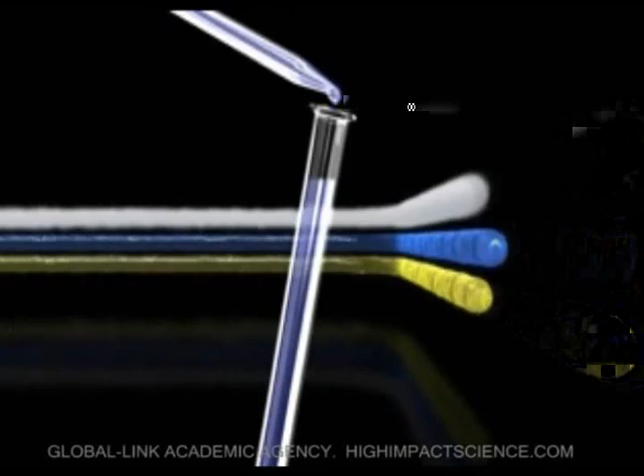The term fluid refers to both liquids and gases. Flow is due to pressure difference between regions. Flowing in systems like pipes, channels, streams, and so on, any fluid experiences internal friction known as viscosity, between its particles and layers.

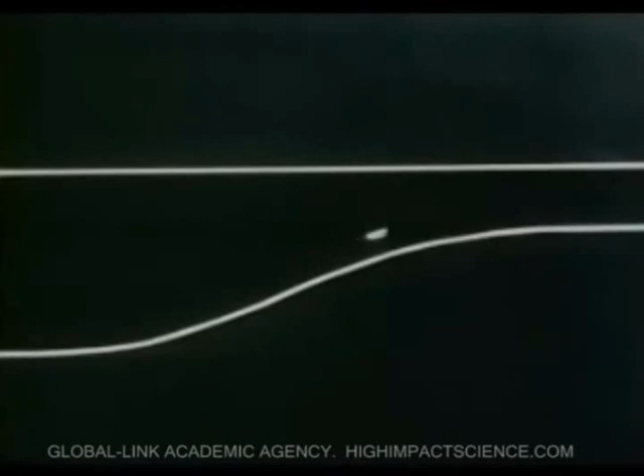In this chapter, we shall ignore the viscosity of any fluid under consideration, by looking at the types of flows: streamline or steady flow. If all the particles at any given point have the same velocity, then they share the same flow and can be represented by a line. A streamline is a curve whose tangent at any given point is along the direction of displacement of the fluid particle at that point.

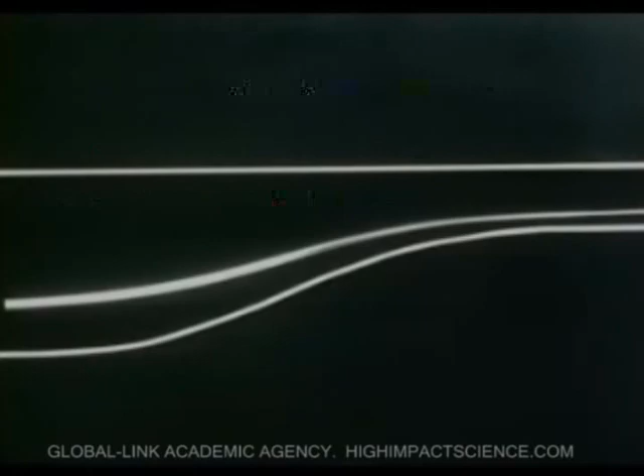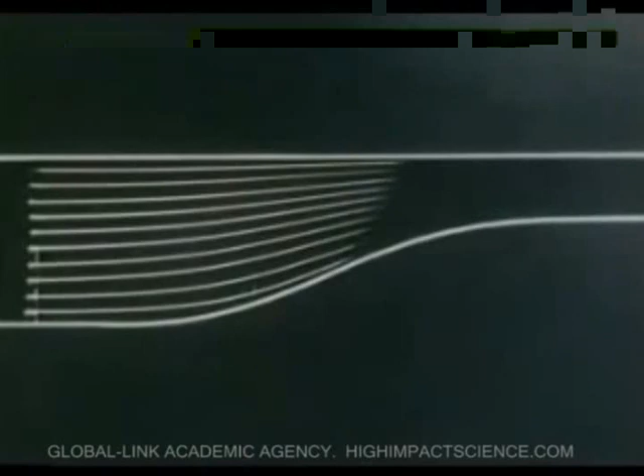However, abrupt changes cause severe turbulence in the fluid. In turbulent flow, the speed of fluid particles at a given point varies, with eddy currents on the fluid particles. Nozzles with rounded edges reduce turbulence, and turbulence reduction is even greater with tubes.

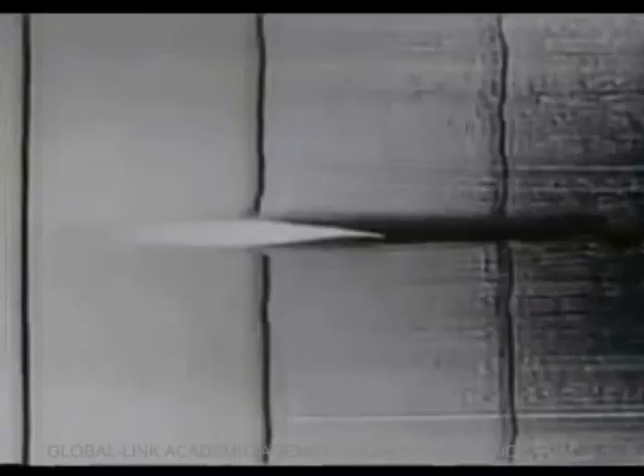In general, streamline shapes do not affect the distribution of the streamline. Non-streamline shapes provide turbulence which affects the particles. Streamlines do not cross, but are closer together where the flow is moving faster. Beyond a certain velocity, known as the critical velocity, flow becomes turbulent.

Let us now look at the continuity equation. In deriving this equation, we make the following assumptions: first, that the fluid is flowing steadily. Second, that the fluid is incompressible, that is, there are no significant changes in its volume. Finally, that the fluid is non-viscous.

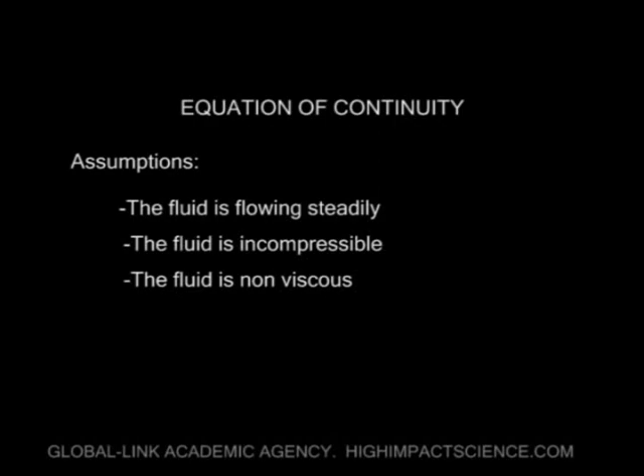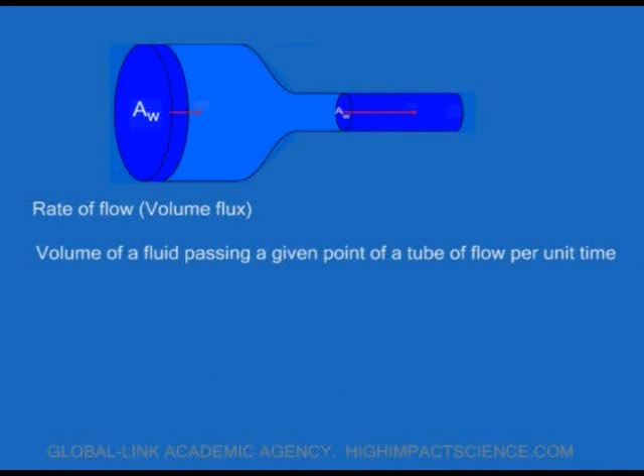The first thing we look at is what we call flow rate, also called volume flux. Volume flux is the volume of fluid flowing through a given section of a tube of flow per unit time. For flow through a region W, the average cross-section area is Aw. If the distance covered by the fluid per unit time is dx, the volume flux through that region will be given by area of cross-section times distance, that is Aw times dx.

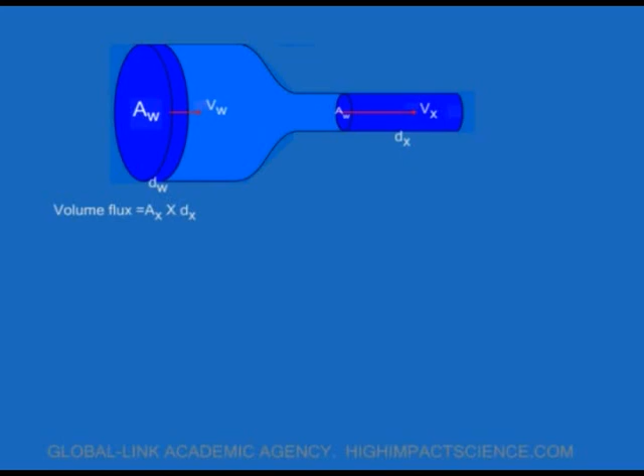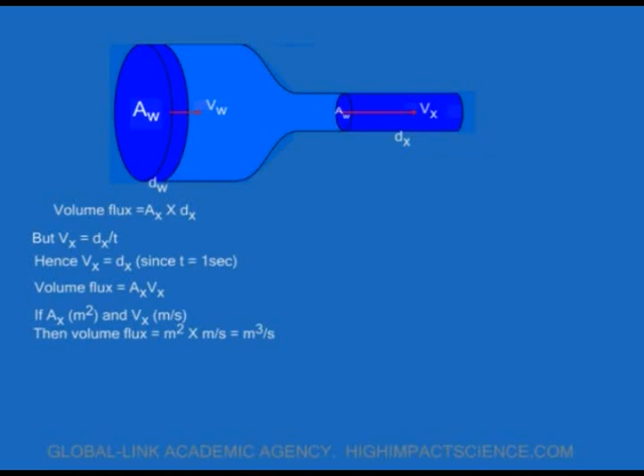Remember, velocity Vx is equal to dx over t. Therefore Vx is equal to dx, since t is equal to 1 second. Thus, volume flux is AX times Vx, where AX is in meters squared and Vx in meters per second. The unit of volume flux is meter squared times meter per second, which gives meter cubed per second.

Next, we look at mass flux. Recall that density is given by mass over volume, and therefore mass is equal to density times volume. It's just simple cross multiplication. Mass is density times volume, taking the density to be rho, so mass flux is rho times AX times Vx. Remember, volume flux was given by AX times Vx. The unit of mass flux is meter cubed per second times kilograms per meter cubed, so mass flux is in kilograms per second.

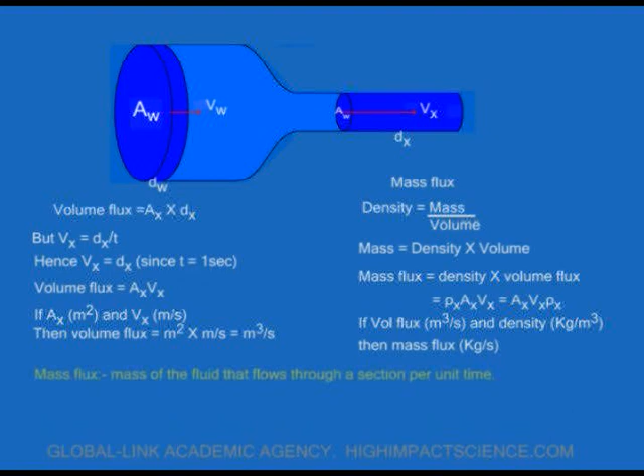Mass flux is the mass of the fluid that flows through a section per unit time. Since the fluid is incompressible, the mass at region X is equal to the mass at region W within the same time, because mass is conserved. So we have mathematically AW VW rho is equal to AX Vx rho. Cancelling out rho, we shall have AW VW equal to AX Vx.

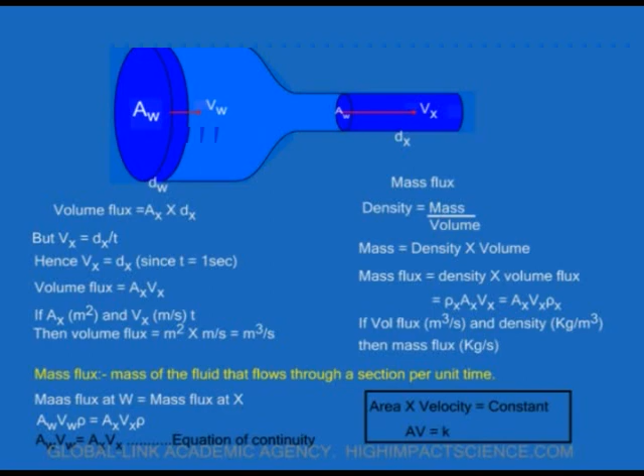AW VW equals AX Vx, that is AV, area times velocity, is equal to K, where K is a constant. It can be deduced that for a non-viscous steady flow, the area of cross-section of fluid is inversely proportional to the velocity of the fluid. Speed of the fluid increases when it flows from a pipe of big cross-section area to a small one, and the converse is also true.

So let's take an example. Suppose a horizontal pipe of cross-section area of 40 square centimeters also has a constriction of cross-section 5 square centimeters. Given that the speed at the constriction is 4 meters per second, calculate the speed at the wider section and the mass flux. We are given the density of water is 1,000 kilograms per meter cubed. Solution.

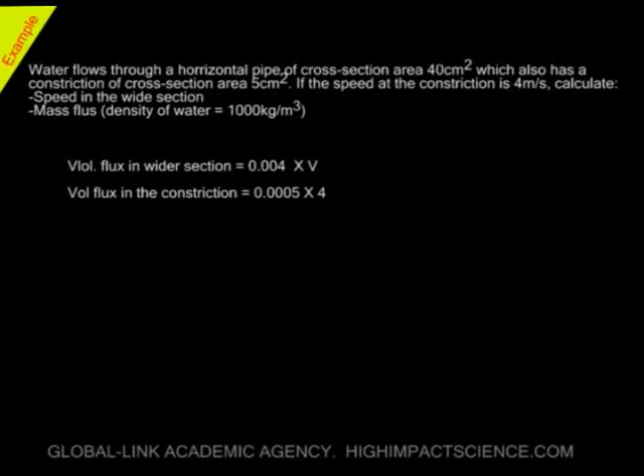Volume flux in the wider section is given by AV, that is area times velocity. First, convert 40 square centimeters to square meters; to do that, divide by 10,000 to get 0.004. Volume flux in the wider section is 0.004 times V. The constriction of 5 square centimeters is 0.0005 square meters, so its volume flux is that cross-section times the velocity. The volume flux is constant, so A1 V1 equals A2 V2. Therefore 0.004 times V is 0.0005 times 4. Dividing both sides by 0.004, I get 0.5 meters per second.

Mass flux is given by density times volume flux. The volume flux is constant, so the flux for the constriction or the wider section is the same. So I take 0.0005 times 4, which gives 0.002 meters cubed per second. So mass flux is 1,000 kilograms per meter cubed times 0.002 meters cubed per second, and the answer is 2 kilograms per second.

Provided a fluid is non-viscous, and its flow streamline, its velocity corresponds to the pressure it exerts.

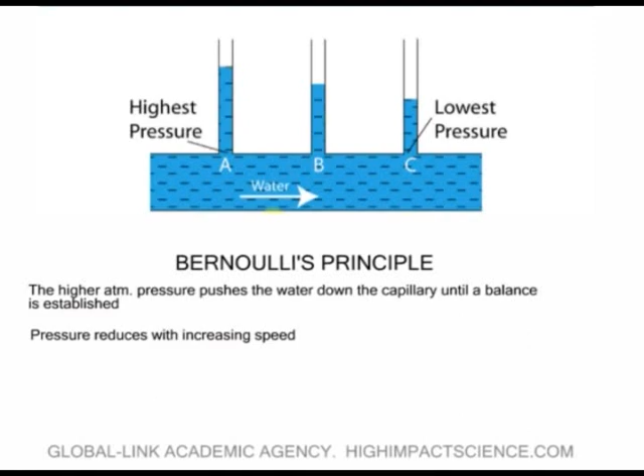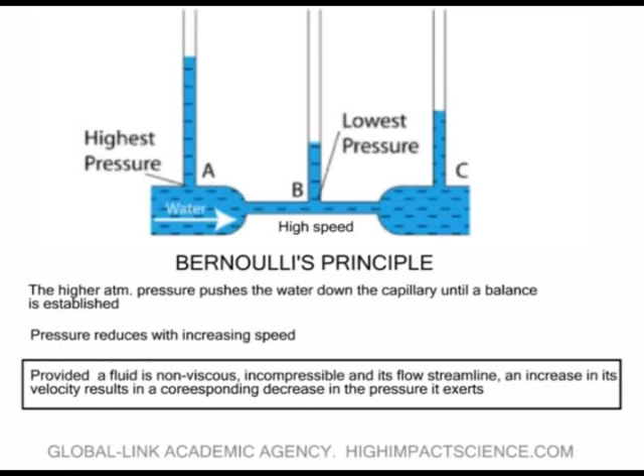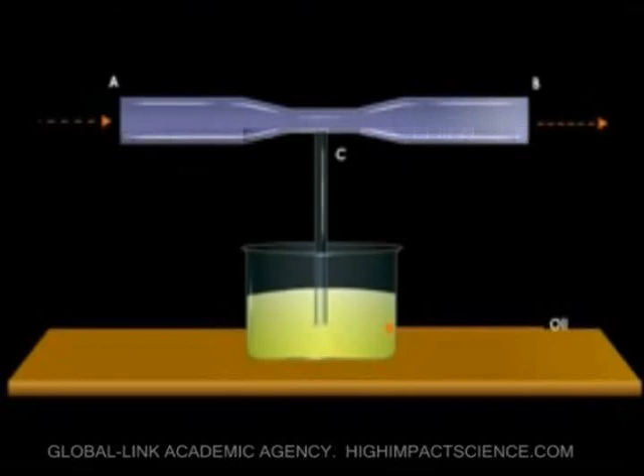The Bernoulli effect: if a light paper is held in front of you and air is blown horizontally over the paper, initially part of the paper is suspended because air pressure is acting on the balance. The air's velocity gets higher than at the initial state. This increase in velocity causes a corresponding decrease in pressure above the paper. Atmospheric pressure acting underneath the paper becomes higher and pushes the paper up.

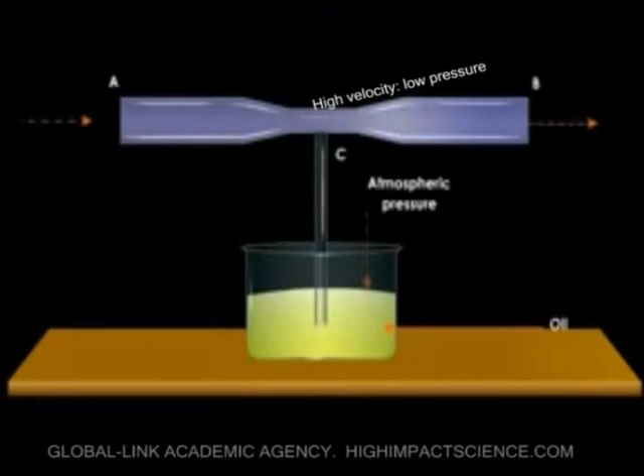Again, if you blow air, the higher speed of air in between the balloons causes reduced air pressure. The balloons are pushed together by the higher atmospheric pressure where the pressure is low.

If you blow near a light ball, the airflow causes reduced pressure. The ball is pushed by high atmospheric pressure towards the path of the moving air, near the water. The highest speed along the water column creates lower pressure, causing the higher pressure region further on to push the ball towards the low pressure region.

Now, Bernoulli's principle can be expressed as an equation. Consider a liquid of mass M and volume V, and let the pressure at a given point be P. Kinetic energy per unit volume is given by mv squared over 2V. But remember, density is given as mass over volume, and hence kinetic energy per unit volume is given by half rho v squared.

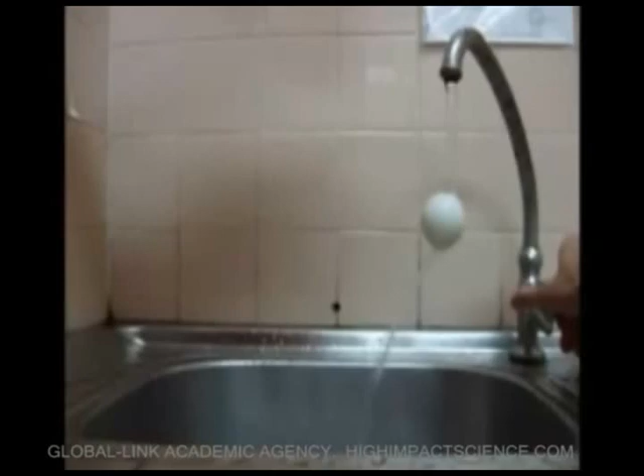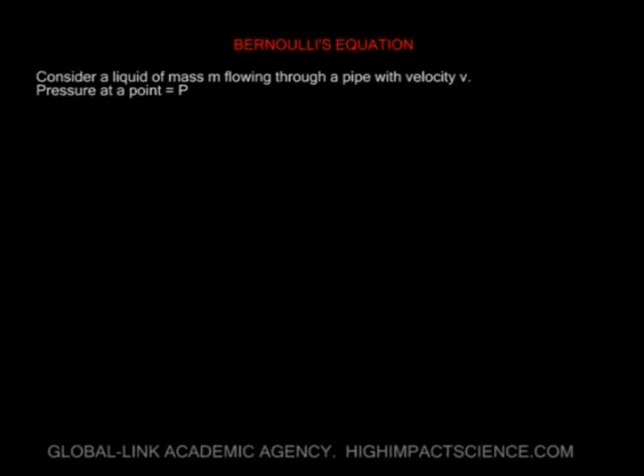Equally, potential energy per unit volume is given by potential energy over volume, but potential energy is given by mgh. Therefore, potential energy per unit volume is given by mgh over V. Using the relation that density is mass over volume, mass is equal to density times volume, and therefore potential energy per unit volume is given by rho g h.

Bernoulli found that if the liquid is incompressible, non-viscous, and its flow streamline, the sum of kinetic energy per unit volume, pressure, and potential energy per unit volume is a constant.

One of the applications of this principle is the aerofoil. Have you ever wondered what makes it possible for an aircraft to fly? Most people probably understand that the wings help the airplane, while the propeller provides the drive force. In total, the forces acting on an aeroplane are lift, thrust, and others.

This is because of the shape of the wing. It is shaped like an airfoil, which generates lift from the relative wind. When air flows over the wing, it moves faster at the top than at the bottom. The slower moving air below puts more pressure on the wing than the faster moving air above.

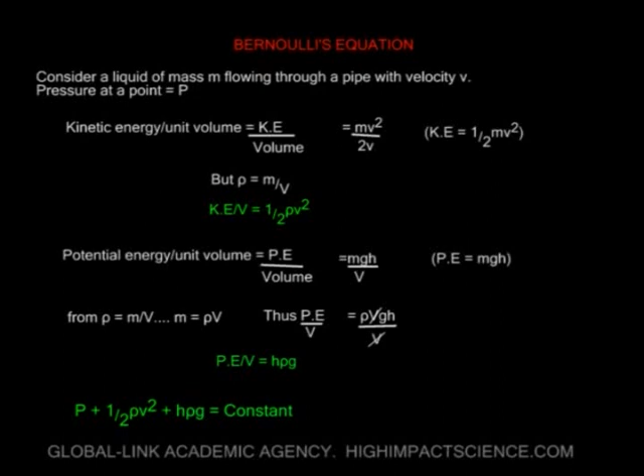This pressure difference, explained by Bernoulli's principle, creates the force of lift, while the propeller creates the force of thrust. So lift and thrust are what help the aircraft to fly. The force created must be greater than the weight of the aircraft, otherwise it cannot fly.

On the runway, a high relative wind speed over the wing generates enough lift to take the plane into the sky.

So the relationship between pressure and velocity was discovered by the Swiss physicist and mathematician Daniel Bernoulli. Giovanni Battista Venturi later performed experiments and built the flow meter based on this principle.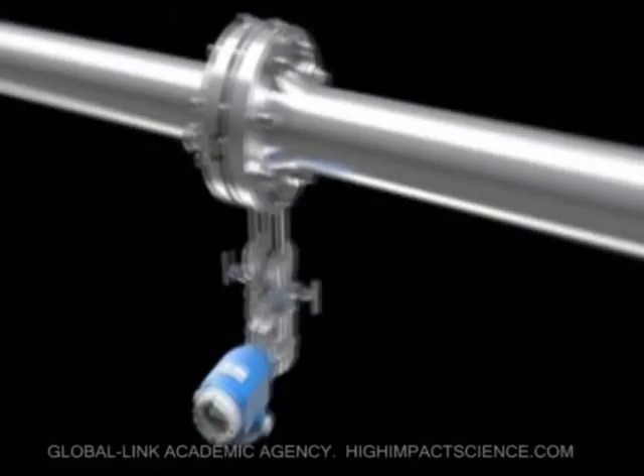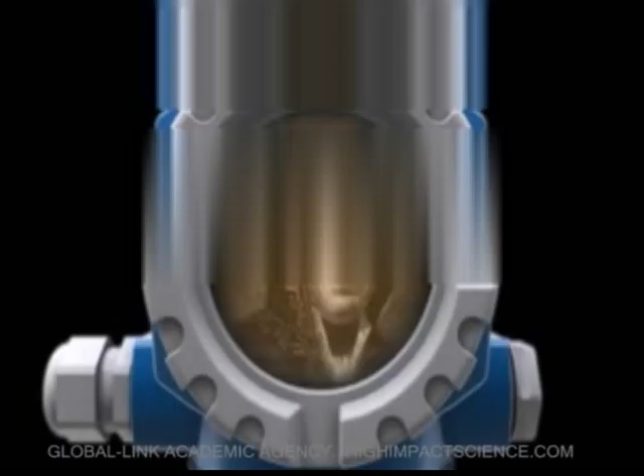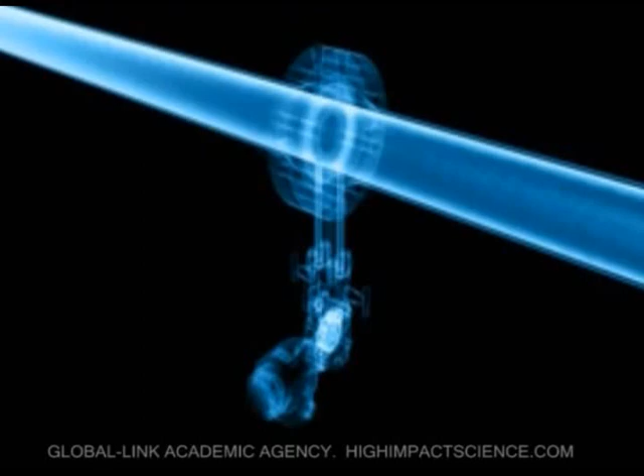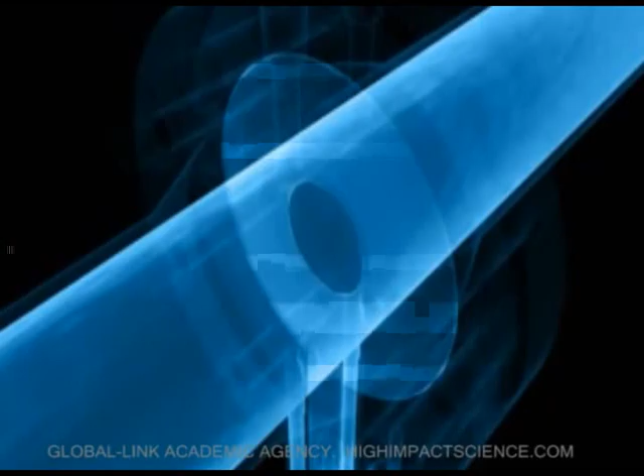Another application of the Bernoulli effect is the blowing off of rooftops. The air blowing by has a high velocity, creating lower pressure above, and the higher pressure air from underneath pushes the roof, which may then be blown up.